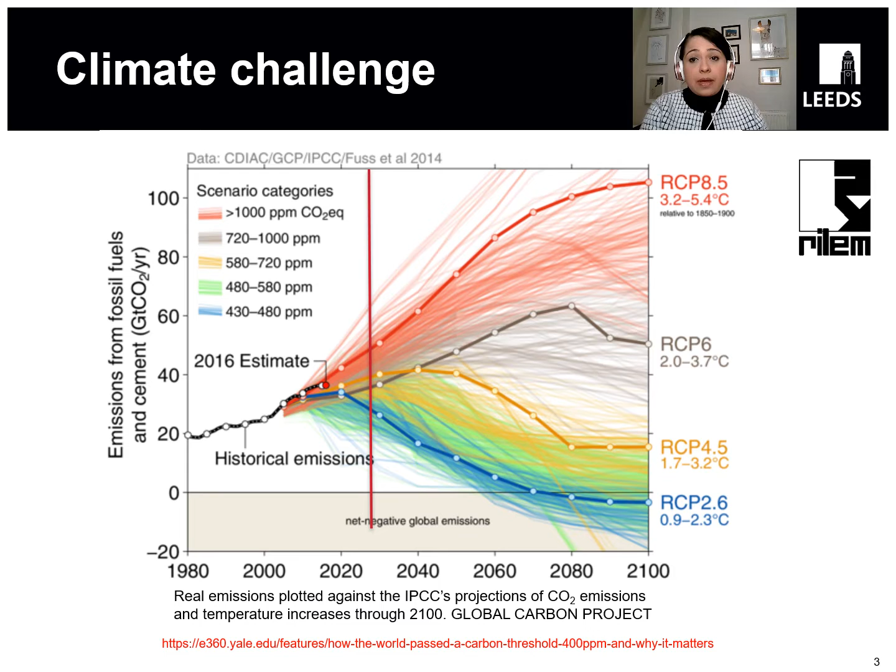At the same time, there is a growing interest in the infrastructure sector to become more sustainable, adopting low carbon technologies, low carbon materials, and so on. But there is also a growing interest in adopting some of the concepts of circular economy: reduce waste of materials, maximize the reuse of buildings or structures to reduce the consumption of virgin materials in the longer term.

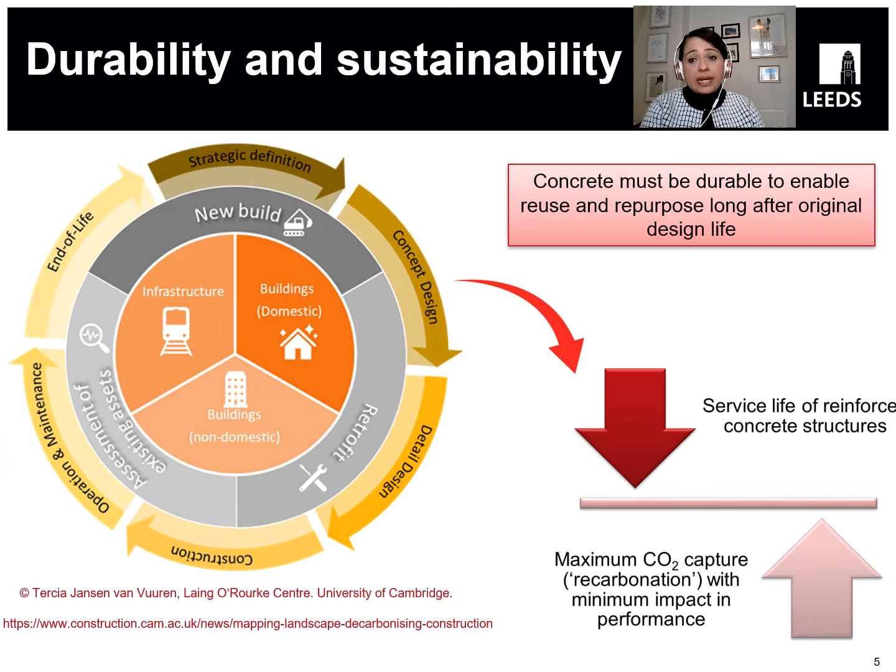In terms of perspectives, at least in the UK, an independent review of the construction sector has described the construction industry as not fit for purpose in the face of the current challenges in terms of performance, resilience, and sustainability. So this is a wake-up call for us to think about different ways to enable transformation.

So one of the first things is rethinking the relationship between nature and the built environment. We need to think that the built environment is our adaptation to the natural environment to suit our social needs.

Therefore, we need to find a balance between built and natural environment and harmonize the way both are protected, so that the effect of one doesn't affect the other.

The other thing is organizational change. We need innovative ways to reorganize the perception of a given infrastructure project. So we need to move from thinking just about the material, just about the design, or just about the purpose of a specific infrastructure individually. And we need to think, in a systems approach, globally thinking, how each of these steps of the process might affect the long-term performance and longevity of that specific project.

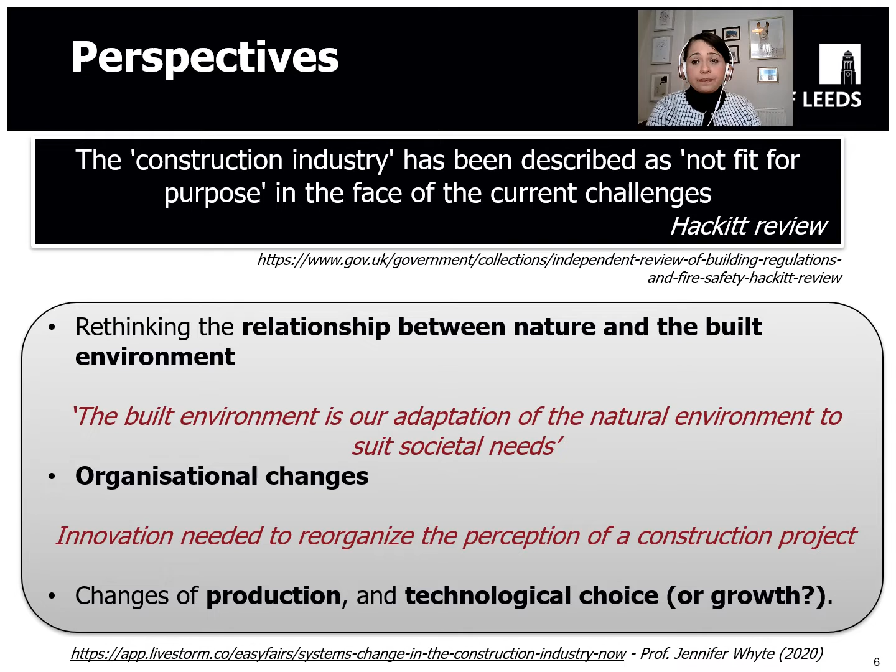So, as many of you might know, the focus of the majority of my research and my professional career has been on the development and assessment of low-carbon materials, specifically alkali-activated cement. In this image, I'm showing how alkali-activated cements compare in terms of chemistry to Portland cement and also calcium sulfoaluminate cement. What is important is that alkali-activated cements have proven again and again their ability to produce materials that can enable environmental savings, at least at their production level, of between 40 to 80% compared with other technologies.

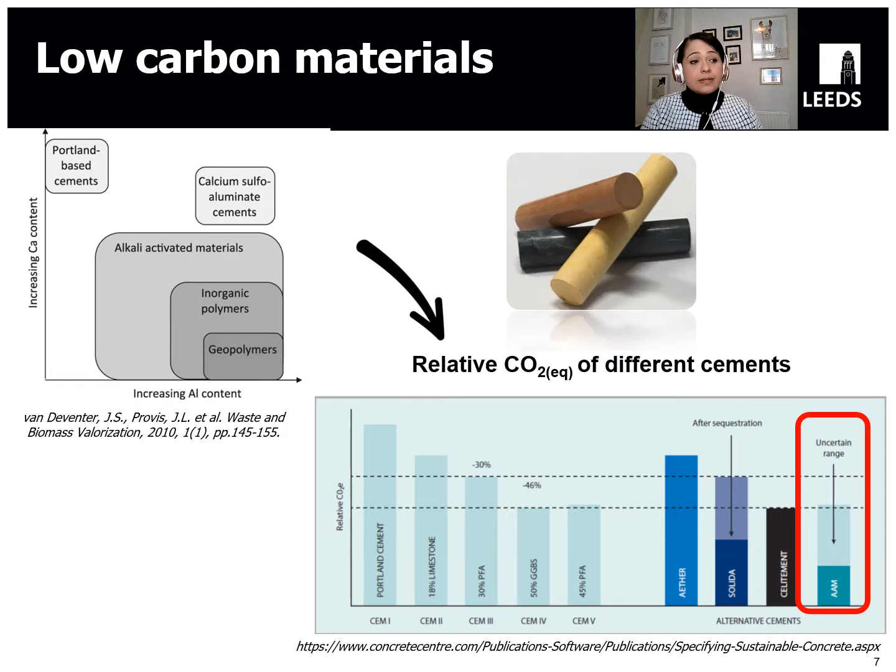The reason being that the majority of raw materials used to produce alkali-activated cements are waste or byproducts from different processes. Also, it is a chemical reaction that can take place at room temperature. And we have discovered over the years that we can tailor the properties of these materials to be advantageous, for example, for specialized applications such as fire resistance or nuclear waste immobilization.

However, when we think about a given piece of cement or concrete, we cannot divorce that from the environment where it's going to be placed. So the concept of durability is not absolute in terms of its link to the longevity of a specific structure. It is an intimate interlink between the material properties and the environment where that material is placed and is going to serve during its lifetime. This is an image that I use often in my presentations, and all credits to John Provis, who designed it, because it shows the huge complexity of the correlation between the concrete and the environment.

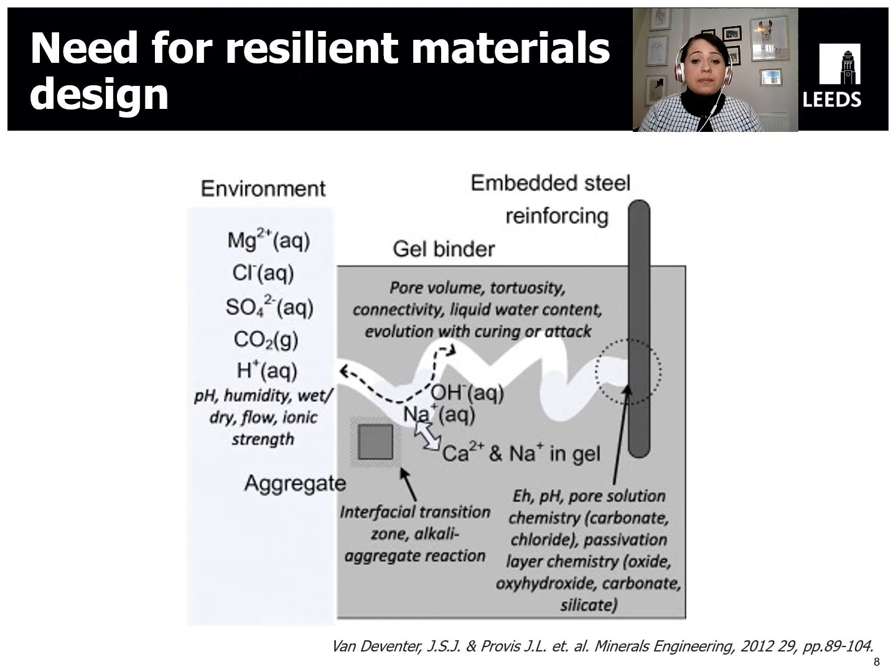So many things can go wrong because there are so many aggressive agents that, once they enter the material, can induce significant changes and perhaps compromise the long-term performance of the concrete.

So my presentation today is mostly going to be devoted to carbonation of cement and concrete. This is a topic of research I've been very passionate about. It was the main topic of my PhD dissertation back in the day, and I've been working on it for over 15 years. Some of the motivations for me to work in this area is, of course, I want to understand how the carbonation of concrete can affect the longevity and the performance in the longer term.

But also because I believe that for a material to be sustainable, it needs to be durable. And CO2 is present in the air. The CO2 concentrations in the air are the highest in human history. So it's one of those aggressive agents that will be present in any infrastructure that we develop. Also, what interests me now is that performance-based standards are being favored for enabling adoption of novel cement and concrete, which I think is the right approach.

However, for us to truly understand the meaning of the outcomes when we test novel cement and concrete using the same testing methodologies that have been developed for Portland cement systems, we need to know the mechanisms of degradation of those cements to be able to say, yes, a performance-based approach is suitable for these materials, or this approach suggests the material can be used when tested under these conditions, but perhaps those are not the right conditions to be testing the material. So it's an open question that I have for myself, if I'm very honest. And this is why I'm very interested in understanding mechanisms of degradation of cement and concretes.

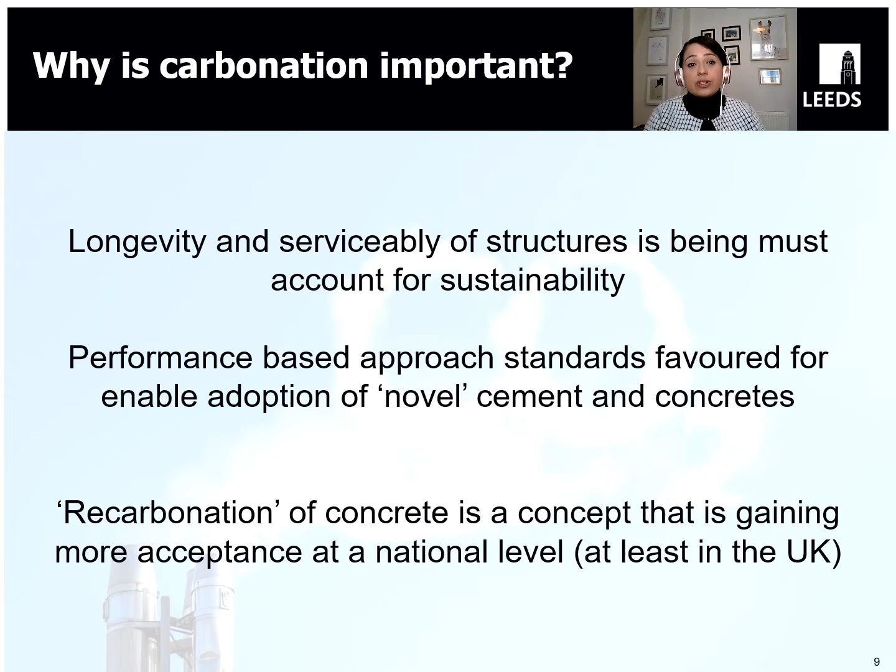So I think the concept is really valid, but at the same time, I'm a little bit careful thinking about how any quantification can be done in a conservative way, so we don't overestimate perhaps the potential of carbonation in terms of CO2 savings in the longer term of cement and concrete.

So today also I want to talk about carbonation of alkali-activated materials. So I started working on this topic during my PhD, inspired by the fantastic work that was being developed by the Eduardo Torroja Institute in Spain, particularly by Marta Palacios and Francisca Puertas on this particular topic.

When I started working on this, very few studies were reporting carbonation of these materials, but what was really interesting to see is that we were trying to solve this problem or understand these mechanisms of degradation in the same ways and using the same tools and perhaps fundamental knowledge that we have for Portland cement systems.

At the time, I remember that I became interested in this topic because everyone used to say, oh, alkali-activated materials carbonate far more than Portland cement, therefore they are not durable, therefore we shouldn't be using them, we should not be studying them. And I remember always wondering, but why is that?

And at the time there was very little information, so I dedicated a long time, a lot of work during my PhD trying to answer some of those questions, and I will say, as any good PhD work, I came out from that project with far more questions than answers.

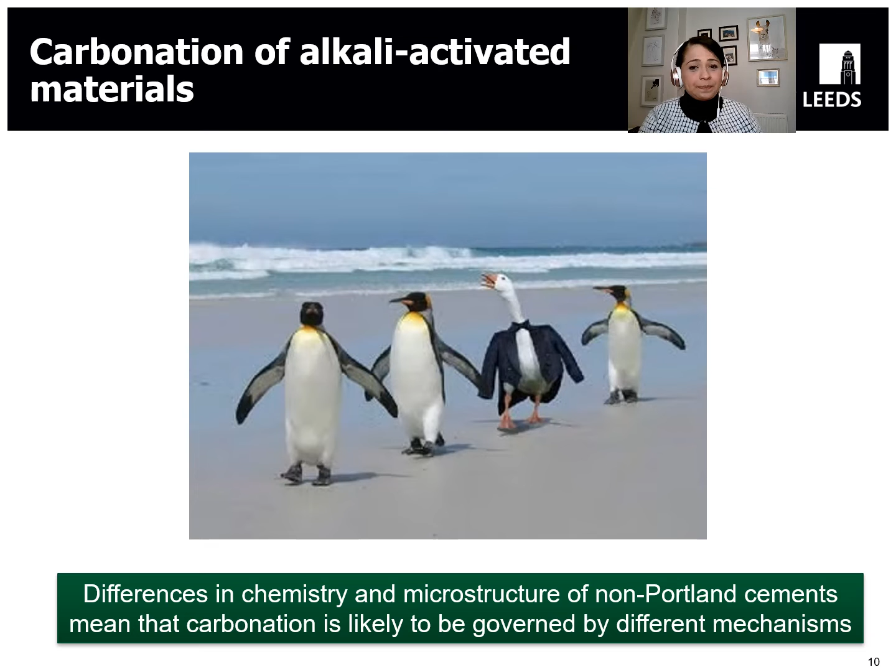So back in the day, I was trying to answer why the results from my PhD are so different to the results that colleagues from the Eduardo Torroja Institute were getting, and also some of the results I was collecting when I was a postdoctoral researcher working with Jannie van Deventer in Australia. So I was very fortunate that at the time Jannie was very active in RILEM as well, and I became involved in this, and I saw the fantastic work that people could do when working together with people from all over the world. So that inspired me to contact all my colleagues in Colombia, in Spain.

Of course, I was working in Australia at the time, and say, can you please send me some samples of your slag? And then for the first time, I could sit down with samples coming from different parts of the world, treating them exactly in the same way, exposing them to the same environment, and see what happened.

So this, I will say, was a milestone scientific point in my career, because when we did this study, we managed to identify that one of the key differences in the three slags that I was studying at the time was the magnesium content. So the Spanish slag was very standard for European slag. The Australian one is fairly standard for Asia. The Colombian one is a quite unique type of slag that unfortunately is no longer produced with this sort of composition.

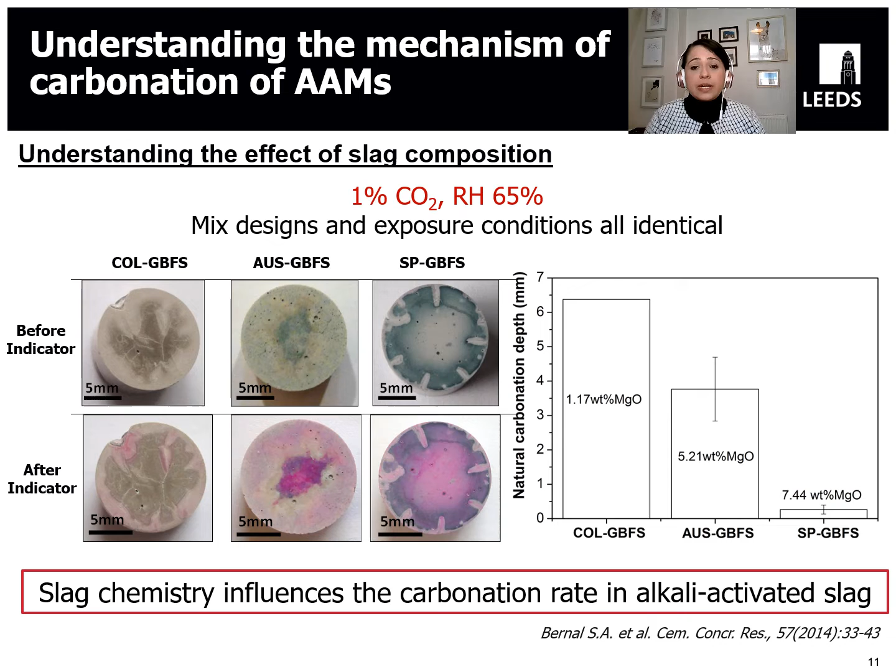So a lot of studies were done in that area, and many published papers were also out there. But then the interesting part was that understanding what was influencing the carbonation of alkali-activated cements enabled us then to use the same principle but studying a completely different chemistry.

So when I relocated to the UK later in my career, I realized that a lot of the comments I was getting during my presentations about alkali-activated cements were regarding the potential global warming effects of the activator, the safety concerns of using highly alkaline activators. So I started working on near neutral salt activated slag cement. I still work actively in that area. And one of the most promising ones was sodium carbonate.

So I started digging in the literature. I realized that early work in Ukraine was being done with sodium carbonate. They successfully produced railway sleepers with this type of activator, and I was wondering why no one else was able to make it work. What's influencing this? Why does everyone say sodium carbonate activated slag cements don't harden, they don't work?

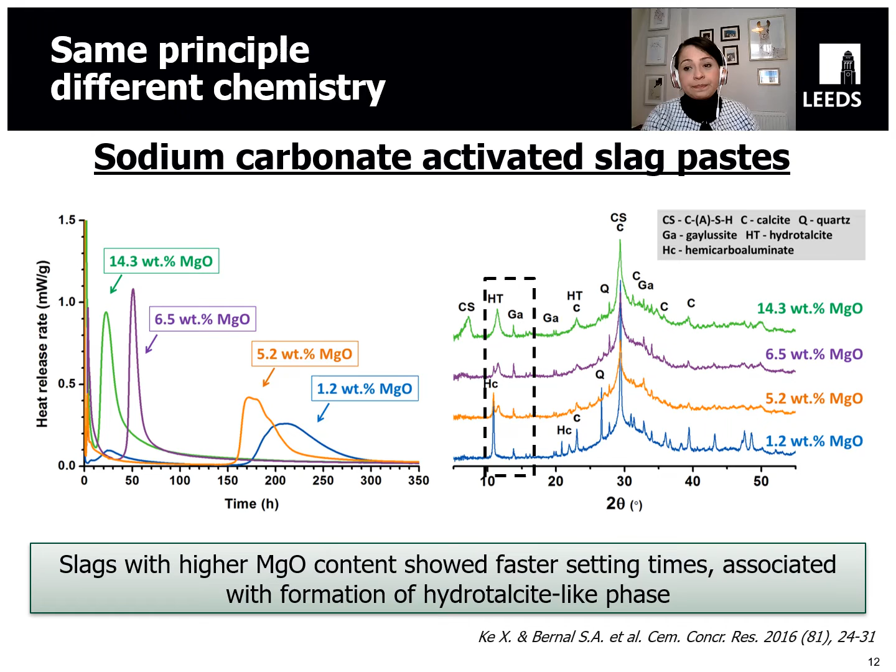And this is exactly what we did. Again, this is the work of Xinyuan Ke, where we exposed sodium carbonate activated slag cements to carbonation. So the formation of this layered double hydroxide has a double effect. It helps to control the kinetics of reaction. So now we were able to produce cements that will harden within expected times with desirable compressive strengths, as you can see here.

But also, this particular type of system seems to be more resistant to carbonation than any other alkali-activated cement that we evaluated before when we used sodium silicate or sodium hydroxide activators. So we can see here that the material is still carbonating. This is in the blue line. However, the compressive strength is not changing, which I will say is the ideal outcome. We want our materials to absorb as much CO2 as possible, but we don't want that carbonation process to compromise the performance of the materials that we're producing.

So this is just to give you a flavor of how understanding the mechanisms of carbonation, discovering some of the factors that influence how the materials perform, or why the materials perform in a certain way, enables us not just to find strategies to improve carbonation resistance, but also to design materials with the desirable properties that we're looking for.

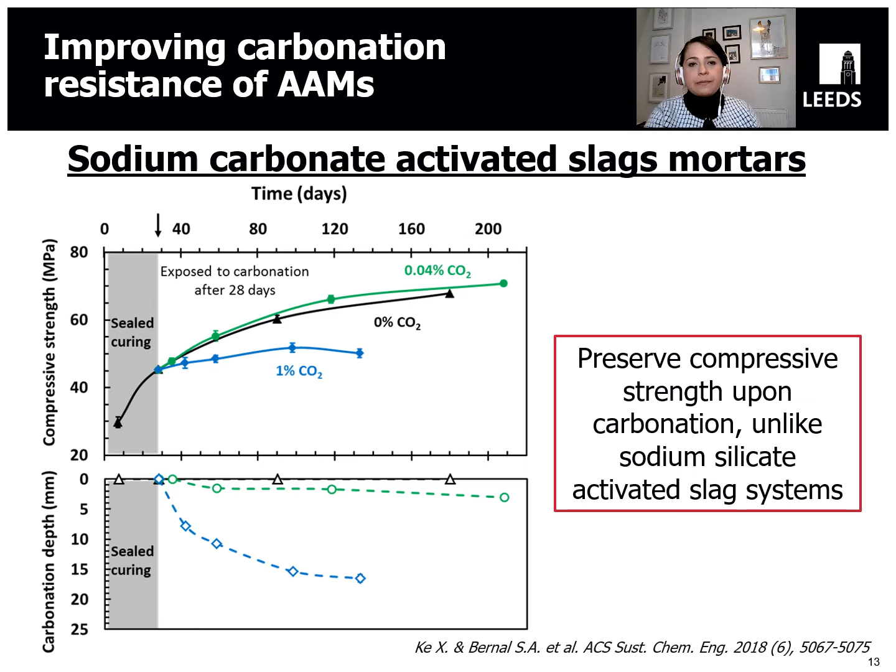So of course, we did some studies adding some nano synthetic layered double hydroxides to validate all these concepts. And well, we were very fortunate that the results demonstrated that we were right, at least in theory, about the performance and the key role of the secondary reaction products on carbonation of alkali-activated materials.

But of course, that sounds fab, but then it opened more questions than answers, because we said, okay, now we know that if we change the slag chemistry, everything will change. If we use a different activator, everything will change. But what we're craving for the widespread uptake of this technology is presenting some universal guidelines that enable people to design these materials in the right way so they can get the performance that they desire to obtain from the material.

So we did some thermodynamic modeling. So we continue working in this area. So these are some thermodynamic modeling simulations of carbonated sodium silicate and sodium carbonate activated slag cements. And I will say at the time these were the closest to what we were seeing in experiments in terms of simulations that we could produce, which I think also enabled us to understand more and more about how things happen.

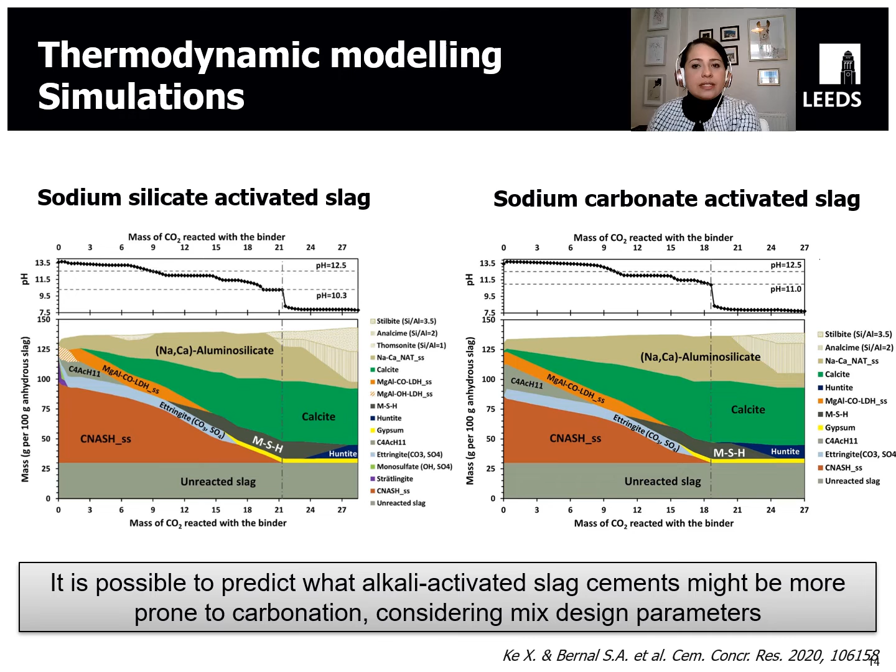But we know that carbonation is not just a chemically controlled mechanism, it's also a diffusion-controlled mechanism. So there is tremendous interest, of course, to understand the pore structure of this type of materials. So in this opportunity, these are micro-CT reconstructions for blended Portland cements with high volumes of blast furnace slag as a function of curing time. So these are not exactly for alkali-activated materials, but I just wanted to show these beautiful reconstructions by James Vigor, who also has been working with me and others for many years in this area.

Because one of the most challenging things when studying cementitious materials is getting a realistic overview of the pore structure. So a lot of the testing methodologies that we use require preconditioning that might induce microcracks in the materials, or we cannot visualize how the pores actually distribute. But this technique is non-destructive, is very powerful, and enables us to see pore size distribution, tortuosity, and therefore calculate diffusivity of cementitious binders.

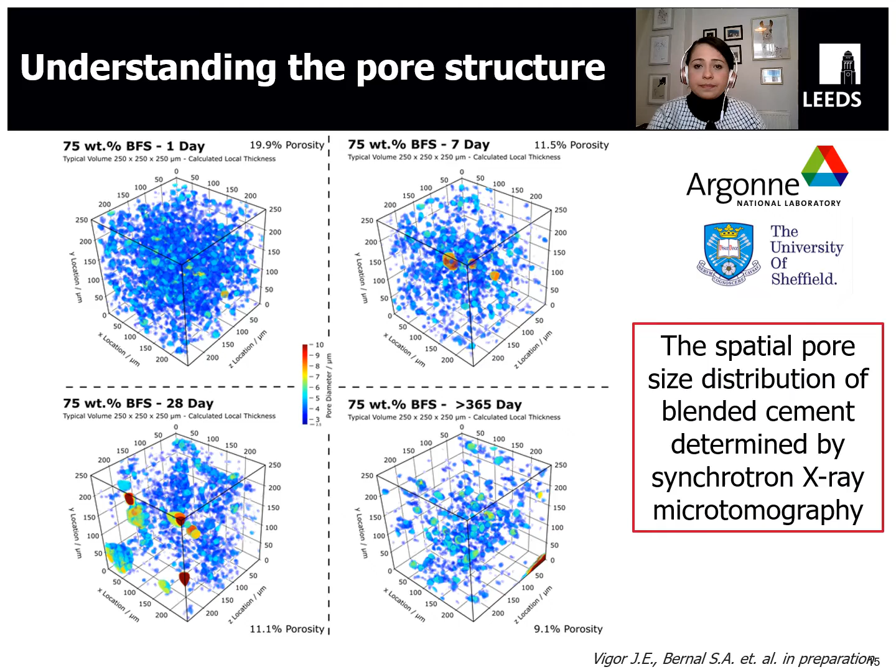So in the case of alkali-activated materials, now that we have this underpinning understanding of how things progress, we wanted to see, okay, now we need to scale this up. We need to bring the transport properties of a given alkali-activated material into the mix to see what's going on. And that's one of the key areas of research that I'm developing at the moment, also with a fantastic PhD researcher, Liang Ye, who's working with me at the University of Leeds.

So pretty much the concept we're using at the moment is not very new. This has been proposed for many years, but it's like the shell or the unreacted core type concept. So what we are assuming is that we will have these different layers of carbonated material, and each of these layers, which we are assuming will be different ages, will have a specific phase assemblage, a specific porosity or tortuosity, and therefore carbonation in each of these layers will occur in a different manner, accounting for the two concepts of changes in phase assemblage for solution chemistry plus porosity distribution as the reaction progresses.

So hopefully in a couple of years I will be able to share some of the outputs of this amazing job that Zhengliang is currently doing.

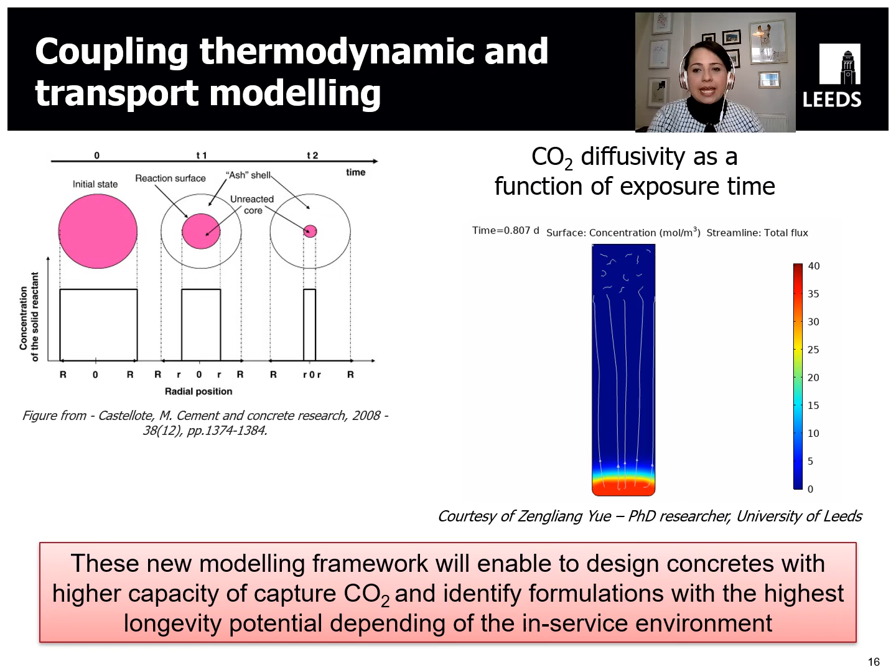Okay, so I don't have too much time left, but I really wanted to highlight some of the work that I've been doing over the years with some of the RILEM colleagues, because I will say I would not be where I am without the fantastic support I have had from the many RILEM friends and colleagues over the years in the different technical committees. But because this presentation is about carbonation, I just wanted to highlight that in the RILEM Technical Committee 281-CCC, we have been thinking a lot about it. There has been fantastic work done over the past few years.

So one of the most interesting things we identified is that there are so many different standards that could be adopted to evaluate accelerated carbonation, with the objective, of course, to somehow correlate that to the natural carbonation performance of a given concrete. And all these different standards suggest different exposure conditions that can be adopted. So for example, we can use 3% CO2, 4% CO2, 20 or 50% CO2. So which one is right? It's very challenging to say, and it's one of the questions that this technical committee was trying to answer.

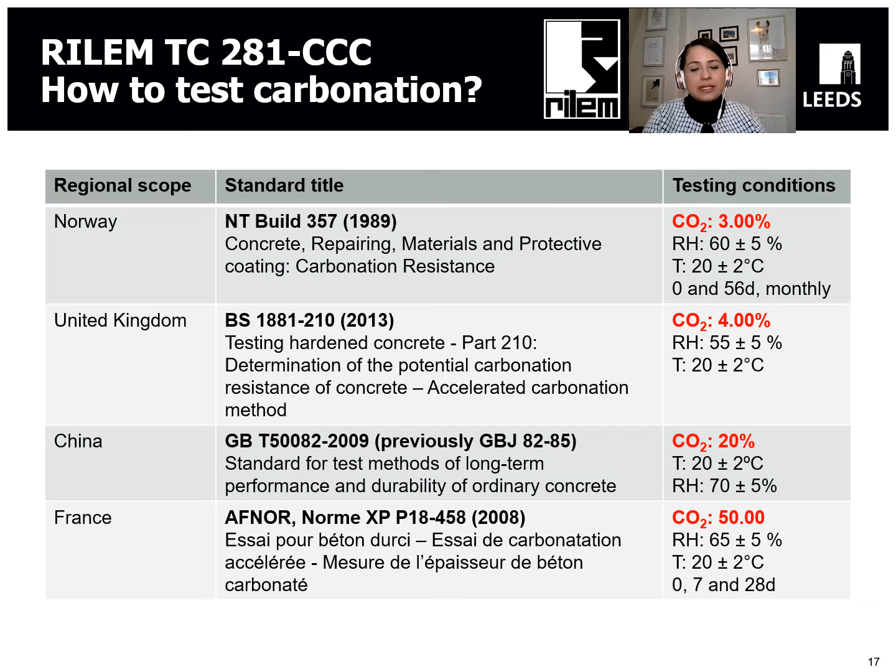So in an effort to try to see if there is a certain exposure condition or preconditioning of concrete that might correlate with the conditions that are being recommended by other standards, this technical committee developed a round-robin test to evaluate the resistance to accelerated carbonation of Portland, fly ash, and blast furnace slag blended cements and concretes.

I will say this work is absolutely amazing. It's not just because of the number of laboratories and countries participating in it, but also by the fact that this work was mainly done during the global pandemic. So I feel tremendous admiration and respect for all my colleagues that continued working in this particular area in such difficult times, and also sharing their knowledge with all of us, or some of us that couldn't participate in the round robin, keeping us motivated and together when we most needed it. But yeah, I would like to invite you to have a look at this paper, because I think it's very, very useful.

And just to conclude the technical part of my presentation, we have also been looking in this technical committee at the carbonation of alkali-activated materials. So this paper was actually just accepted this week in Materials and Structures, and I really wanted to highlight it and invite people to look at this paper when you can. The reason being that this paper was a tremendous endeavor putting together a database of all published data on alkali-activated concretes and high-volume SCM concretes exposed to natural or accelerated carbonation.

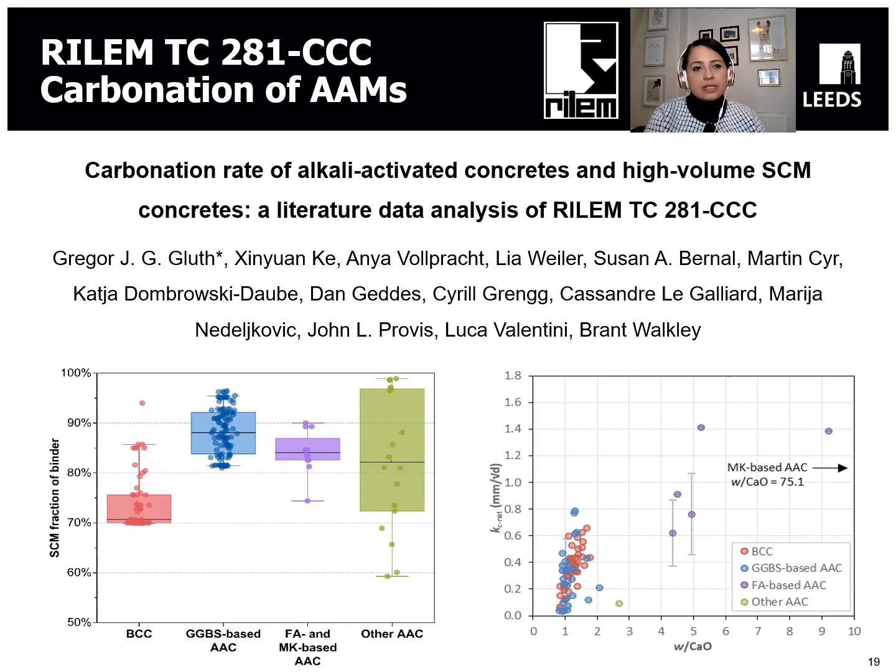So the database is massive, but some of the outputs are really relevant, because this study demonstrates that the carbonation coefficients of alkali-activated concretes, or some of them, are comparable to those of blended Portland concretes that are currently used for many applications. So this demonstrates that the premise that alkali-activated concretes cannot be used because they will carbonate more than the concrete we use now is not entirely true.

What next for me? Well, I will say I've been inspired the past couple of years to move a little bit away from fundamental research and start thinking about how the research I do could be put to better use, thinking about cross-sectorial approaches, thinking about foundation industries, energy-intensive industries, and how different concepts or strategies to decarbonize different sectors could be shared across all of them.

So I'm part of the Transforming Foundation Industries Network Plus in the United Kingdom. We collaborate with industries of 6 different sectors, and we center our work in resource recovery from waste, circularity of waste feedstocks, and opportunities of transformation. And also, I have become more interested in circular economy and how we can use these new cement and concrete technologies to minimize the use of natural mineral resources.

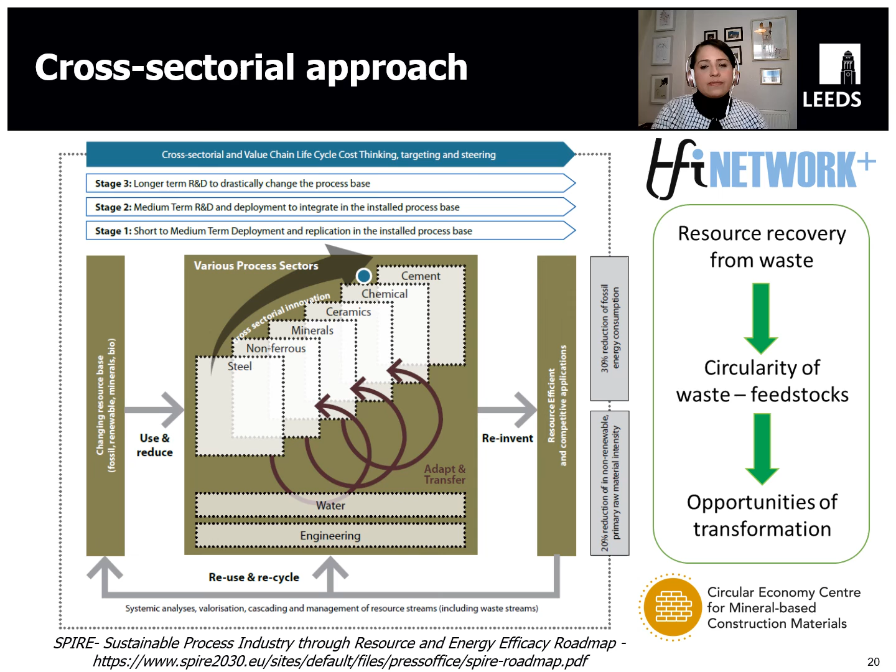So, of course, I would like to thank all the different universities, funding agencies, industries as well that have sponsored my research and have enabled me to do what I really love. I feel very privileged today doing this presentation because I do what I love, and I've been having a lot of fun over the years doing research in different areas. So, of course, without this funding and this support, I would not be able to do it.

And also, I would like to thank RILEM, because all the different technical committees I've been part of throughout the years, and all the fantastic friends and colleagues I currently have, thanks to RILEM, have inspired me and have supported me, and I love how we learn from each other and we support each other. And I think that has been more visible over the past few years. Also, I would like to thank my family, because without their unconditional support, I would not be where I am. And I would like to thank all the former students, current students, former postdocs, current postdocs, collaborators, technicians, secretaries, everyone that in one way or another has made a contribution to my research and enabled me to make my research vision a reality.